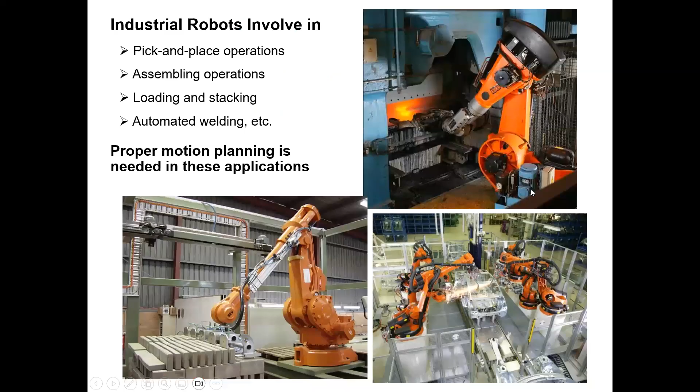Let's look at why we need trajectory planning for robot manipulators. Here you can see a few photographs of manipulators being deployed for various industrial applications, such as welding, part handling, automotive industry assembly, etc.

All these different operations in industry where you use manipulators need trajectory planning. Think about a pick and place operation. The robot manipulator has to pick up the pallet from a pallet feeder, and then move it to some other place. So it's point to point, or pick and place: picking from one point, placing on another point.

When I say picking from one point, there's an orientation also. The pallet is on a certain orientation, and when you place it somewhere else, you can't just drop it randomly, it has to be placed with a certain orientation. So position and orientation are both very important.

Think about fixing a wall fixture using a screwdriver and a screw. You need to drive it in that axis, then only it will move into the wall. So even if you get the tip of the screwdriver on the head of the screw, if you don't have the orientation right, you can't do that. So it's not only position, orientation also matters.

In most applications, this orientation is also a very important requirement. But there are some other applications where only position is important, not the orientation. For example, writing on paper, some people use a vertical pen, some use an angled pen, so the orientation doesn't really matter there. As long as you have the tip of the pen on paper, that's all you need, along with a bit of pressure.

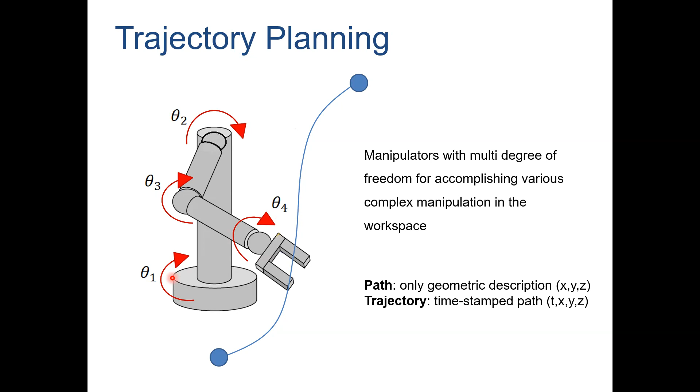Now, what we really need to be careful about is not to exceed the joint limits. Every joint of the manipulator has a maximum speed and maximum acceleration—you cannot exceed those limits. So even if you plan your trajectory in X, Y, Z with a desired speed for welding or laser cutting, once you convert it back to joint space, if the joint speed in any of these joints exceeds that limit, you cannot implement that trajectory. You have to change the time, give it a little more time, and reduce the acceleration.

So therefore, this part over here, you have to check thoroughly whether you are exceeding joint accelerations, joint velocities, whatever, before you actually use the trajectory that you developed to control the manipulator.

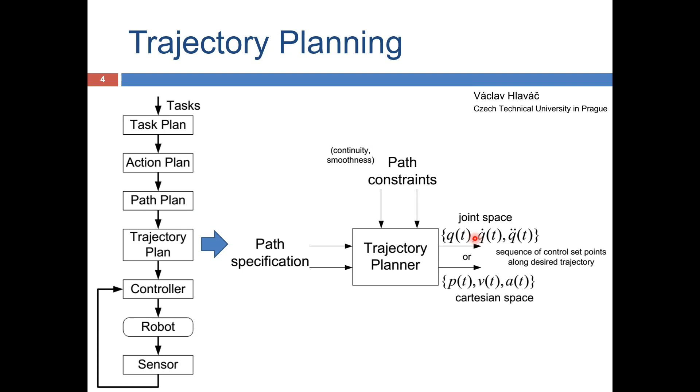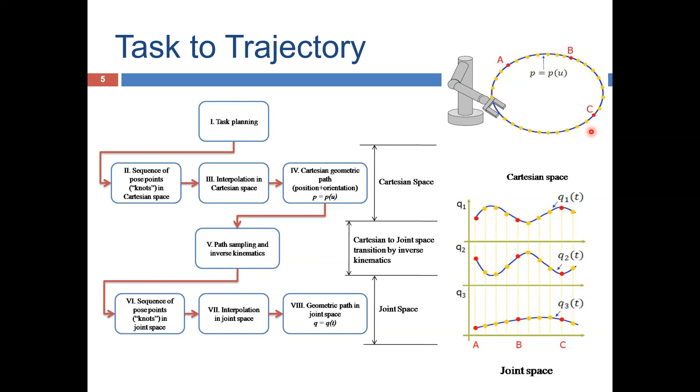Now this data file, you can see, you can put the time also between these points. Same timing over here, so at any moment of time you know what is Q1, Q2, Q3. You give these as reference points to the controller. The controller will try to move joint 1 to Q1 position, joint 2 to Q2 position, joint 3 to Q3 position. At each timestamp, the controller makes sure it drives the 3 joints to their respective positions. So when you do that, the endpoint will be located at the corresponding yellow or red point. This is what happens in manipulator controls.

So what do we mean by unpredictable? Because all these points are known, right? What we really mean by this unpredictable nature is that even though you take 2 points in Cartesian space, point 1 and point 2, and convert these into joint angles, Q1, Q2, Q3 for the initial point and Q1, Q2, Q3 for the final point, and then sample between the 2 points and execute, when you execute that, the end effector will not go in a straight line in Cartesian space. When you see how the robot is moving, it will not move from point A to point B on a straight line as you see it, because the trajectory is planned in the joint space.

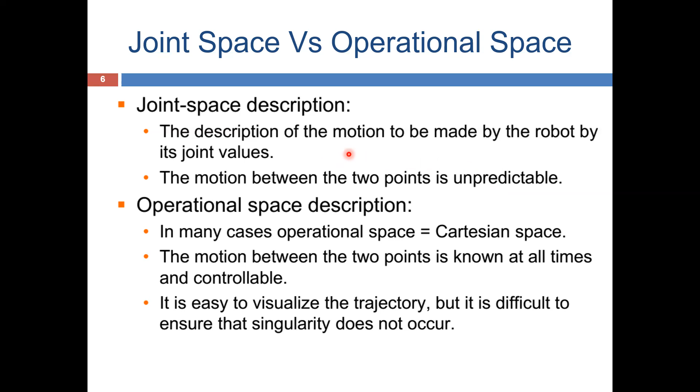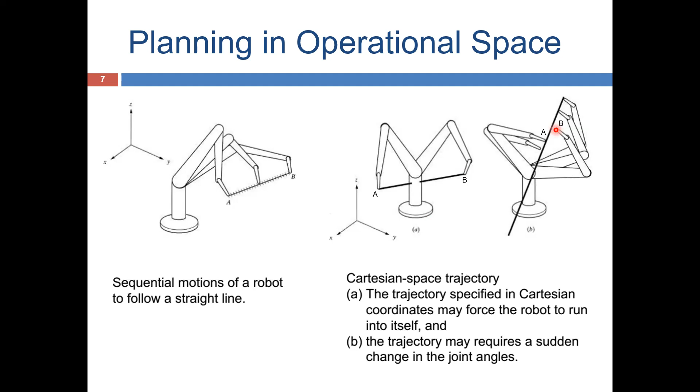But the advantages are a collision-free path can be obtained. So all these things can be visualized and eliminated. If you really want to go from A to B, of course you can't go through a straight line. Why don't you have another point somewhere, say C? So you go from A to C and then C to B. You can visualize and implement, introduce modifications to the path so that these collisions are not possible. Here also you can visualize there's certainly a problem and do something about it. All these things are possible in Cartesian space.

The disadvantages are: computationally expensive, having to deal with inverse kinematics, having to solve inverse kinematics on the fly in real time is a huge computational burden. And it is unknown how to set the total time. So it's not perfectly true — you can have software to tell you the optimum time straight away once you specify the path. So if you have to specify the time upfront a priori, it's a problem. But you can have the system developed in such a way so that it will automatically set the optimum time. In that case, you get rid of this disadvantage also, how to set the optimum time from A to B.

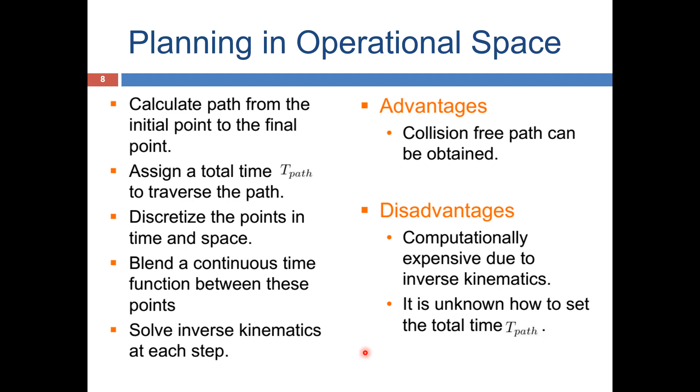But if you plan in joint space, calculate inverse kinematics from initial point to the final point. Inverse kinematics solution at initial point and at final point only, not in between. Assign total time using maximal velocity in joints, then discretize the individual joint trajectories in time, blend a continuous function between these points. So everything is happening in joint space.

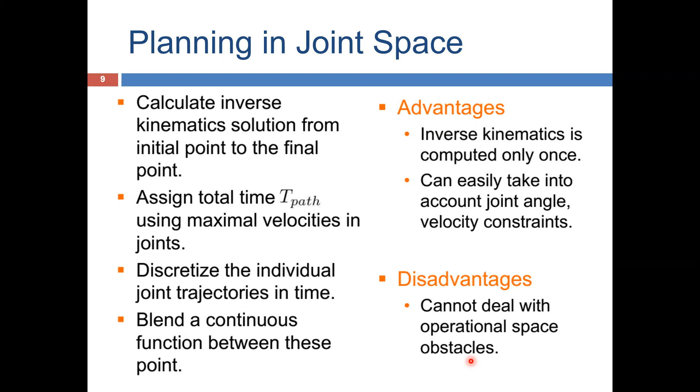And motion with a via point.

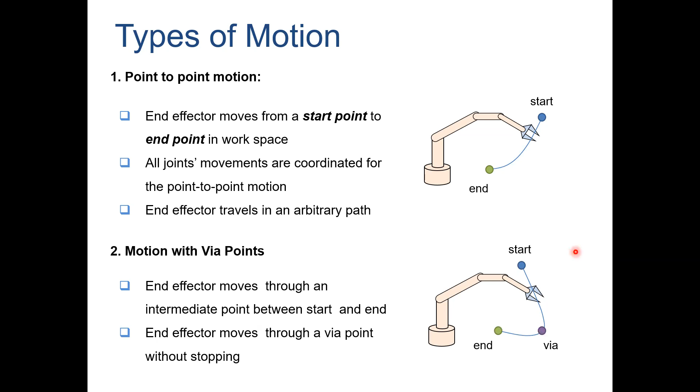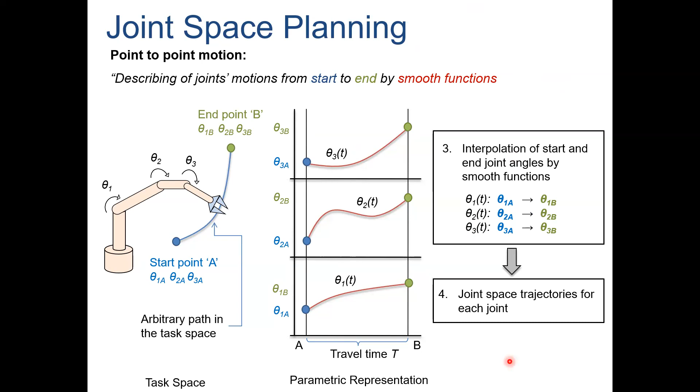Now, suppose you generate a very smooth trajectory, then you enjoy these benefits. But if you don't have a smooth trajectory, what will happen? Your trajectory is not very smooth, it's a non-smooth trajectory, so you will see vibrations. When the robot is moving, you can hear this screaming sound, and also sometimes you can feel the vibration. The table on which the robot is located can also vibrate, making sound and all that. You will hear all these things. And if the motion is very smooth, sometimes you don't hear anything. You can see the robot moving, but it doesn't make any sound other than the motors powering, and motor motion generates a little sound, only that.

If your path is very smooth, actuators do not saturate. They don't go to the maximum limit and hit the ceiling and stop. So any path deviation because of actuator saturation will not be there.

But for whatever reason, if your trajectory is not smooth and optimal, if it drives one of these joints to its limit, let's say if we talk about PWM conditions, it hits the 100% PWM and needs more. Unfortunately, the motor cannot be driven more than 100%. So it runs at 100%.

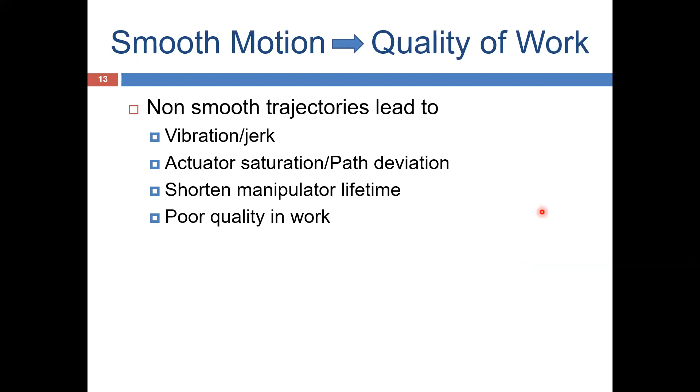So that is the first part of the lecture. And the second part, we start from here. I'm going to show you different techniques that you can actually design a path.

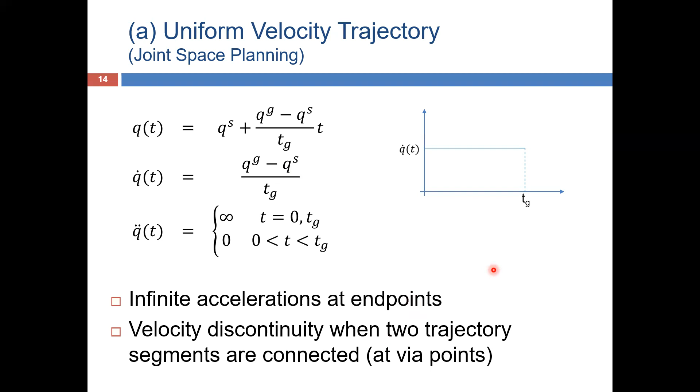So we do not encourage having sudden accelerations in the trajectory. Do not plan your joint trajectories with sudden acceleration. It is not good. So we'll have to see other trajectory planning algorithms.

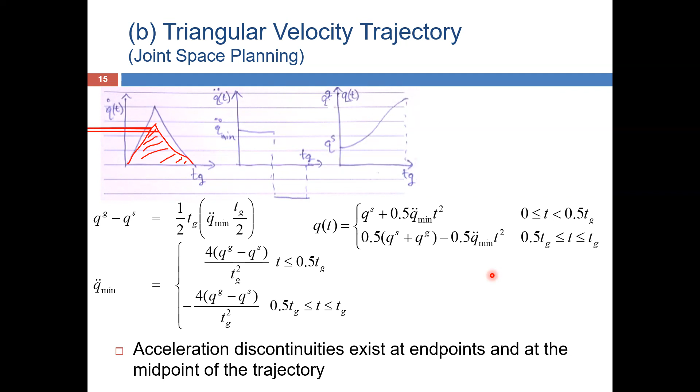Let's look at the third trajectory planning algorithm. This time it is trapezoidal. So now please track all these things. First one we discussed was uniform velocity. Second one, triangular velocity. Now it's a trapezoidal velocity profile. We keep improving the quality of the trajectory.

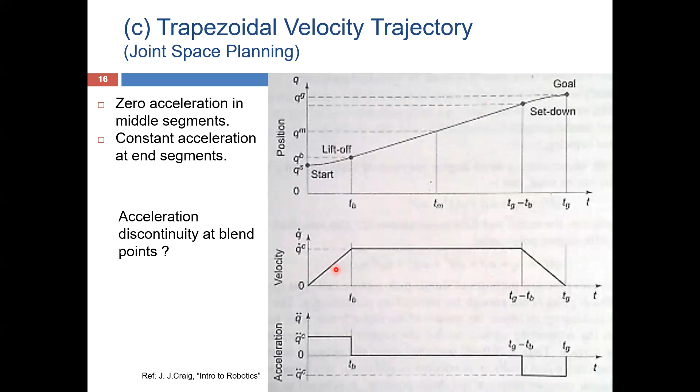So let us continue with the trapezoidal velocity trajectory for a while. Let's try to write down these equations. The first equation we can write is the total angular motion from start to the end, the total angle. As you can see, it's two triangles and one rectangle in the middle. The total area under the velocity curve is the angle.

So you can write down this equation. Please follow it carefully. Qg minus Qs, it has to be Qs. The total angle, right? 2 times half of the base here, that is half TB, times the height.

Height is Q double dot B, that is the acceleration, times TB, okay? Plus the rectangular portion here, that is Q double dot B times TB, that is the height again, times the distance. This is the time actually. So it is Tg minus 2Tb.

So Tb is this time. You get rid of 2 of these from the total time. So this is a rectangular part, this is the triangular part, 2 of them. So then you can simplify this one into this equation, which gives you Tb square and Tb square here. So it's a quadratic equation of Tb.

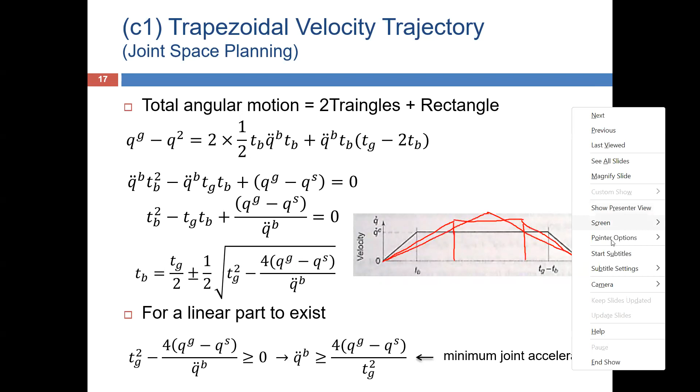So for this linear portion to exist, the acceleration has to satisfy this second part. If you get TG right over here, you add a little amount and subtract the same amount. That amount has to be greater than or equal to 0. So that quantity within the square root has to be greater than or equal to 0, which means acceleration has to be greater than or equal to this one. This is the same equation we received earlier, minimum joint acceleration. You cannot reduce the acceleration below this value, q double dot b.

Now, if you have many points, and if you want to apply the trapezoidal trajectory for a set of points, not 2, maybe 3, 4, 5, what you would be doing is just this: you take 2 points and plan the trajectory, and then at another point plan that trajectory segment and go on. So this is what is called multi-stage linear parabolic blend or spline. Trajectories are planned separately, but then connected together.

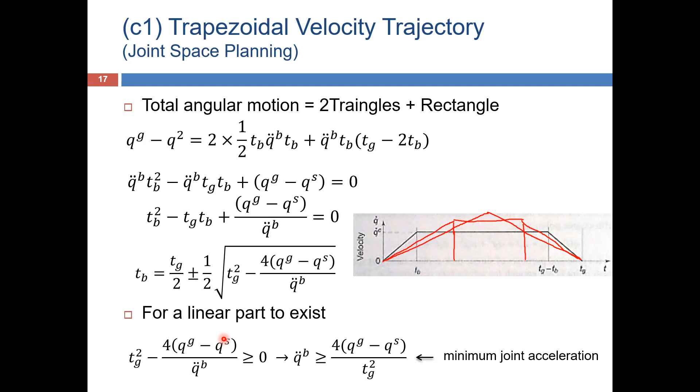So you can have so many of these things added together, but generally that's not the case, right? At via points, you do not stop, you keep going. So you have to plan it like that. This is the first point, second point, third point, fourth point, and you plan your trajectory like that.

So these points here, the black dots, are actually not the trajectory points. These are virtual or pseudo via points. The actual point is over here, where I have the laser pointer. This is the actual point. And for this one, this is the actual point.

These are pseudo points. We use the pseudo point to make this a straight line segment to plan the trajectory, to segment it: first segment, second, third, fourth, and so on. But when you plan the trajectory, we plan it from here to here, so we are actually going through the joint angles that we really need the end effector to move through.

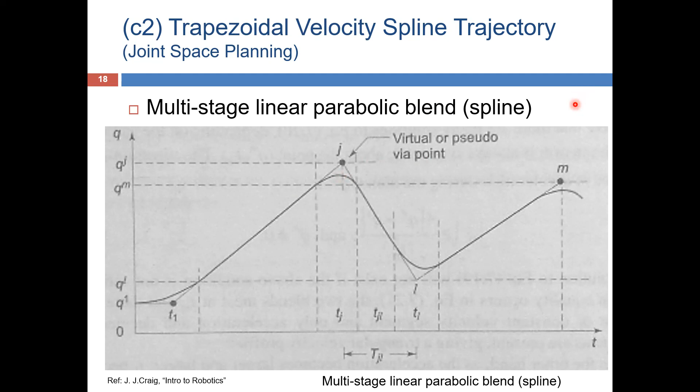Now let me show you the polynomial trajectories. So what is a polynomial equation? It looks like this: the joint angle Q of t is equal to a0 plus a1t plus a2t squared plus a3t cubed. This is a third order polynomial. You can have any order, you can add another term, plus a4t to the 4, then it's a fourth order polynomial.

But we prefer to have as low order polynomial as possible. So let's start with a cubic polynomial. Once you differentiate the cubic polynomial, it becomes a quadratic, second order polynomial. And if you further differentiate it, you get the acceleration of the joint - it's first order, a straight line, in other words. And if you further differentiate it, it becomes a constant.

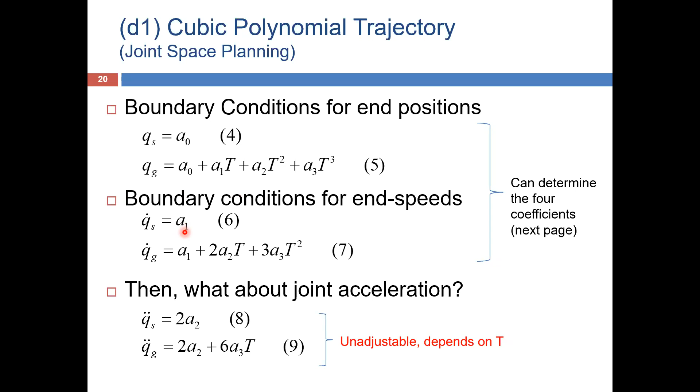A3 and A2, and earlier you got straight away A0 and A1. So all the parameters are known. Now, if you set your initial velocity to 0 and final velocity also to 0, what will happen? Right, cubic polynomial with 0 speed at endpoints.

If this is the case, say for example, pick and place. You pick it from here, and when you are picking, you have 0 speed, right? And when you are placing, again you have 0 speed. So if that is your requirement, your initial and final velocities are 0.

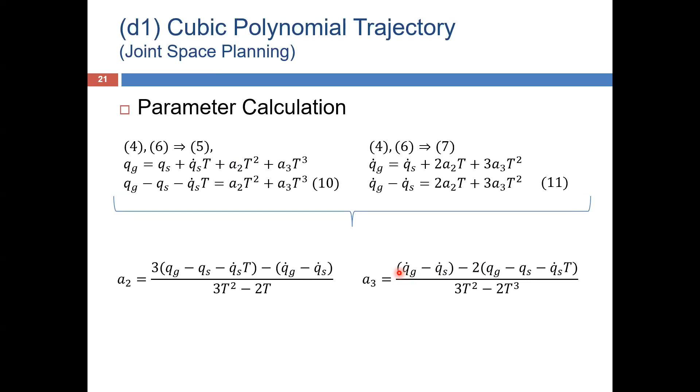Which means you can see over here this q dot s, qg dot, qs dot - these are all zeros, okay. Initial velocity, final velocity, they are all zeros. The dots are gone. When the dots are gone, your A2 and A3 would be like this. So therefore, depending on your trajectory requirement, these coefficients change, all right?

In that case, if you look at the position, velocity, acceleration, it will look like this. Can you see it over here? Velocity, look at the velocity curve, this dash line. You start with 0 velocity, end up at 0 velocity, okay? And then your acceleration goes like that. And your position is a curve, it looks like that.

Now, if you have another point after this, right, you have to start with this position where you stop. Of course, you don't have to do anything extraordinary here because anyway, the next segment will start from here, right? So this final point position will be the first point position for the next segment. You start over here, and if you look at the velocity, it's 0. So you have to start with 0 velocity.

Acceleration, something like maybe -6 or something, right? But you cannot achieve that one. So for the next segment, acceleration will be different. So acceleration discontinuity is there because we cannot control it with cubic polynomials. Is that clear?

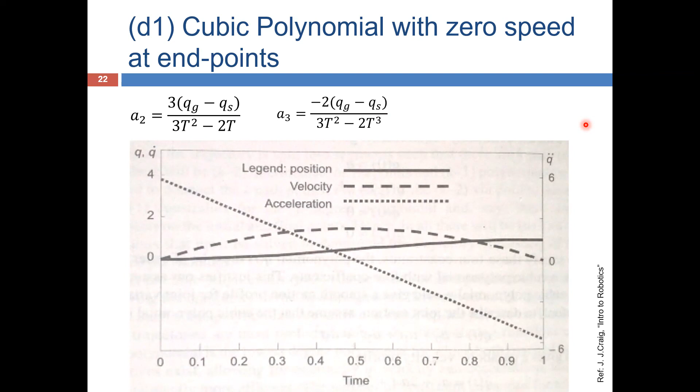Now let's look at cubic splines. Earlier you saw the parabolic blends, or parabolic trapezoidal splines, remember? So we have one trajectory using trapezoidal velocity profile and another one, and you combine them together, right? You can create a big trajectory like that.

Same thing, same concept here with cubic polynomials, right? So you have a start point, end point, and in between a number of via points. So what you do is you take the first 2 points, then the next point, the next point, and so on, and create these trajectories and combine them together.

Now let me show you this example. We already know that when you have a cubic polynomial, you get an S-curve for the position, okay, joint angle, right? S-curve. If you have a trapezoidal velocity profile, the difference is in the middle of the S-curve you have a straight line segment, okay? But in cubic polynomials, you don't have that straight line segment. It's a continuously transitioning S-curve, right?

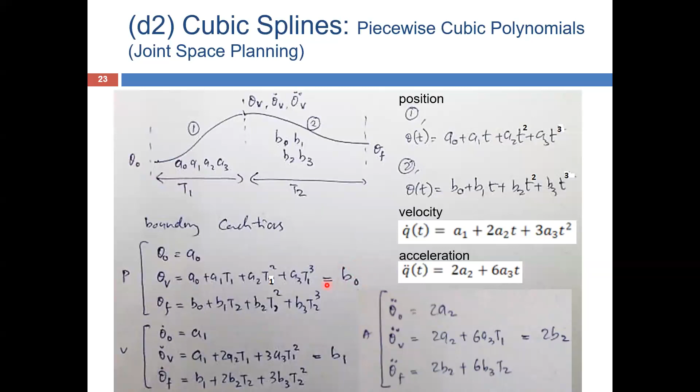In fact, you can see this equation here: position merging and velocity merging. Now 3 parameters are gone for velocities, and 3 and 3 is 6, so we're remaining with only 2. We can select any 2 of these. Shall we satisfy the initial acceleration and the final acceleration? If you say yes, we can do that. Then that's all we can do.

At the via point, the middle point, you cannot satisfy the acceleration. So the acceleration with which the first cubic polynomial ends is not equal to the acceleration with which the second polynomial starts. Therefore, there's a discontinuity at the via point in joint acceleration. This is the maximum you could do with a cubic polynomial.

So you can see it here: A0, A1, A2, A3, B0, B1, B2, B3 - 8 coefficients and 8 equations. You cannot satisfy all of the equations, not all, but many of them, right?

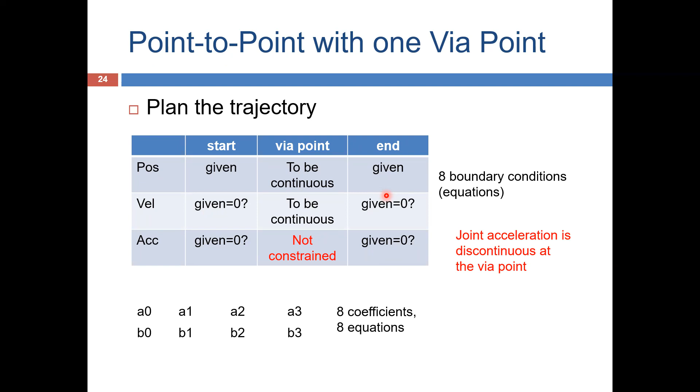As we saw earlier in this table, at the start and end point we satisfy the position, velocity, and acceleration. What we do not satisfy is the acceleration continuity at the via point - only that. So the start point of the next cubic polynomial is equal to the end point of the polynomial before it. So you can satisfy all of these things in the table, and then you have smooth motion continuously, except at these midpoints, where the acceleration is not continuous.

So I do not expect to generate any assignment out of this, but if you can take this as part of your second assignment, so much the better, because now I'm going to give you an extension. Think about some of these algorithms to code your trajectory. I don't recommend uniform velocity trajectory planning, but if you can try a trapezoidal velocity profile or triangular velocity profile, or maybe something like this, it would be really interesting to see.

Now, what if you want to satisfy acceleration constraints that you were unable to do with the planning algorithms we discussed so far? If you want to control not only acceleration but maybe jerk as well, what do you think we should do if you want to control acceleration and beyond, jerk, etc.? What do you suggest?

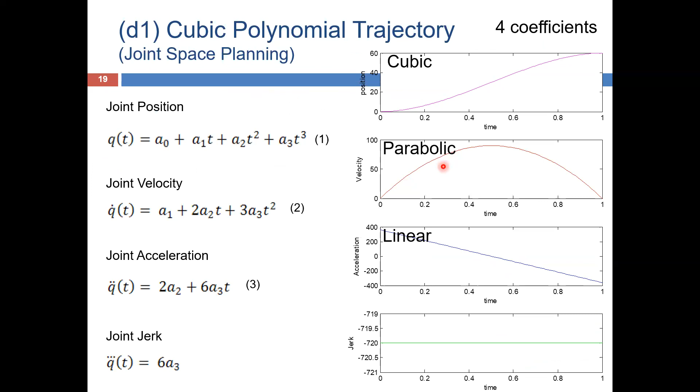Any questions, please? Right, if there are no questions, let's wind up the session today.